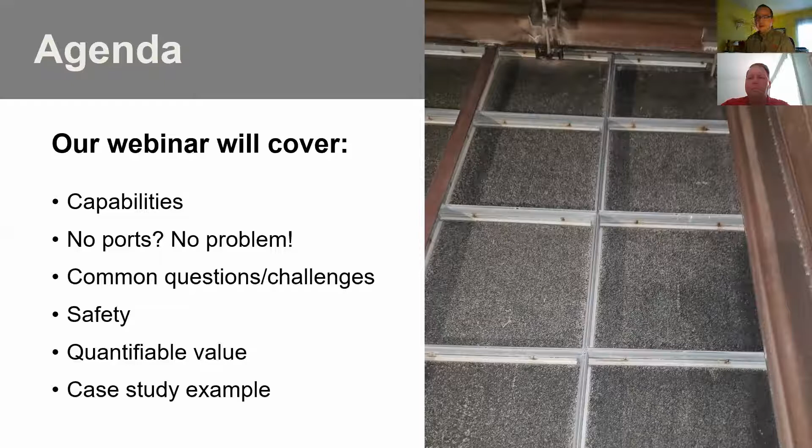We're going to cover 6 main points today: process capabilities and how the system works. Port installation. You don't have ports? No problem. Some common questions and challenges that we see daily. Safety. Fifth, quantifiable value. What can this service really do for you? And lastly, we'll introduce a new case study from a recent project you all might be able to relate to.

Thank you, Steve. Just to start, the port layout is probably the most critical part of our planning stage. It helps us facilitate access to ensure that we can clean as much of your catalyst surface as possible. If you can provide unit drawings for your wall design, all we would need is the wall thickness, your insulation depth. Do you have a liner plate? Do you have positive or negative pressure? And are there any interior impedances, beams, columns, any other obstructions? We would need to know about that.

And when we do port installations, we typically prefer to do one port installed at a time to ensure there's no unit interruption. But in an emergency situation, we could discuss doing multiple ports at once in order to get you back at peak operational performance. Before we do that, we would need to do a review to make sure it can be done safely.

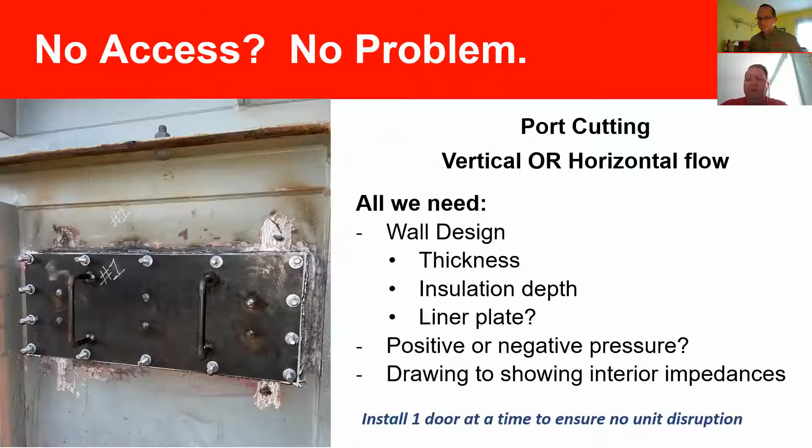In units where there's a horizontal layout, where the floor is open, like a grating system, as opposed to a catalyst resting on beam supports, we've been asked if we can clean through the grating, and the answer is yes. In that instance, we would just need to increase the vacuum to take into consideration the extra distance away from the catalyst face. The important thing to remember is that this is a repeatable process, basically an investment in plant stability. Once the ports are installed, you can do a routine online cleaning anytime you want to keep your facility running at peak performance.

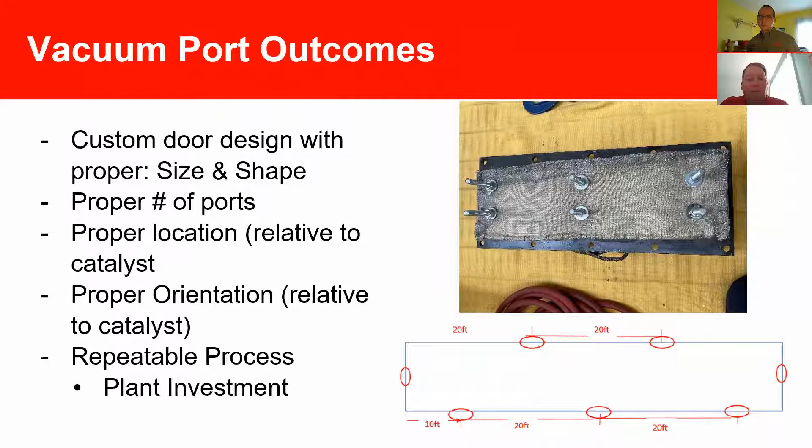Can you clean your catalyst online? The answer is yes. We can and have serviced all catalyst manufacturers, any age from brand new to 10+ years in service. All designs can be cleaned, whether corrugated, extruded, pleated, or if you have a small or large pitch.

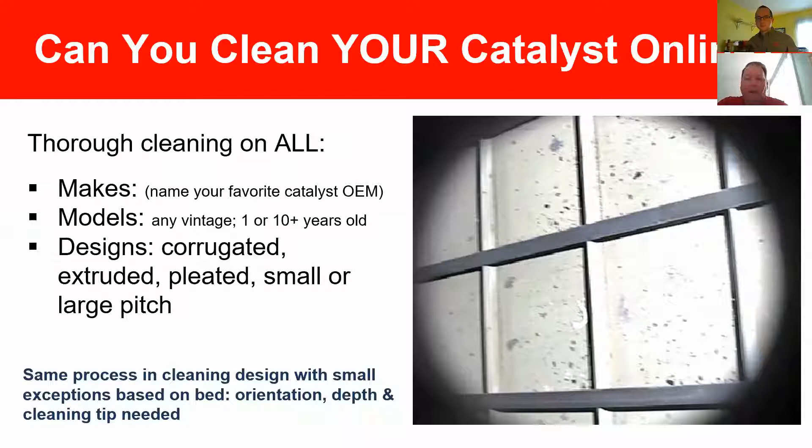An important safety item to consider is, what is your current operating temperature? Most catalyst systems operate in the 700 to 800 degree range. This is important information as it helps us determine the necessary PPE and cleaning equipment to provide work safely and efficiently. I'll cover some of this in detail in a case study at the end of our presentation.

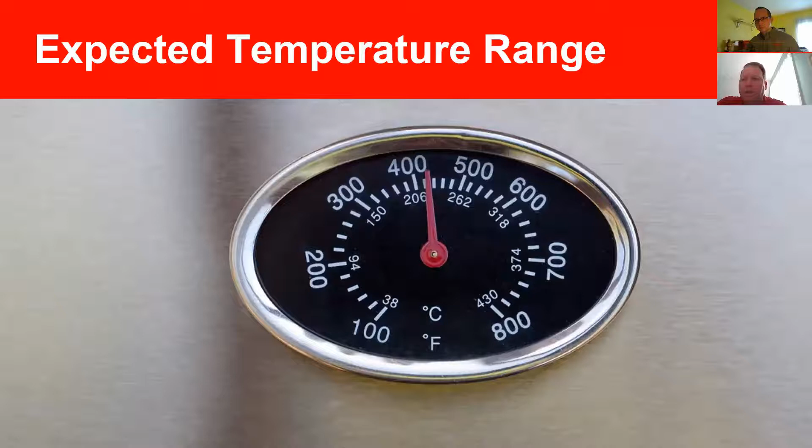Thanks, Ray. We get a lot of questions on, which catalyst can we clean? The SCR, also known as the DeNOx catalyst or NOx catalyst, is the most prominent used in this space of refining and petrochem, but many of you who are listening to this also have a CO catalyst, which usually is the first line of defense in the gas path and very prone to masking. So it is a candidate for online cleaning. We can certainly clean both SCR and CO catalyst, as they both require the same process to clean them online.

So no matter what type of catalyst, it's very common to see obstacles that need to be considered in the cleaning design. No one unit out there is exactly the same. So there's three main or common obstacles that we see, and I want to just introduce how we deal with each one, so you feel more comfortable with it. Ray's touched on a few of them, but I'll dive in a little bit deeper here.

The first off is the module grid. There's a lot of 90-degree angles created by the grid that allows material masking debris to accumulate. In this particular instance, we're going to have a custom lance tip as a solution to get into that corner and pull vacuum and be able to clean it effectively. Second, it's not uncommon to see structural beams through the middle or around the perimeter of the duct, which can create an obstruction. We're going to design a lance orientation and design, as well as port location, to account for this so we can gain full access.

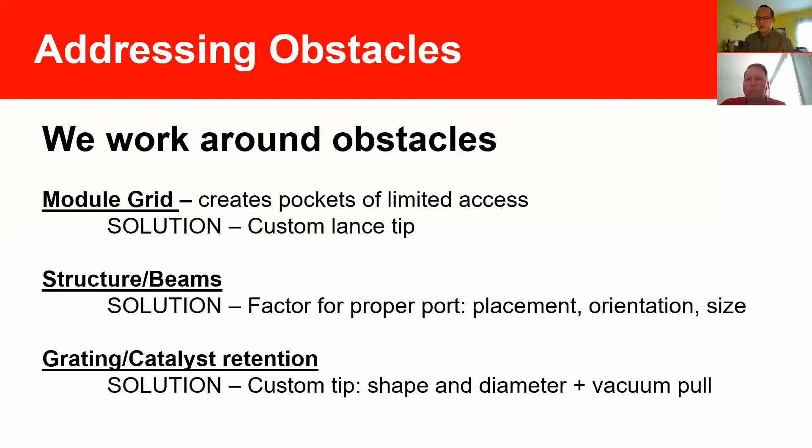So the answer to your question, if you're concerned about stack particulate, it is not an issue or should not be a concern. Since we're only pulling vacuum and not back blowing as we would with a traditional offline cleaning, online we're pulling vacuum only. Any debris that we liberate is pulled into the vac bag, and we use up to 27 inches of pressure, which is more than adequate to collect the debris and not have it go downstream.

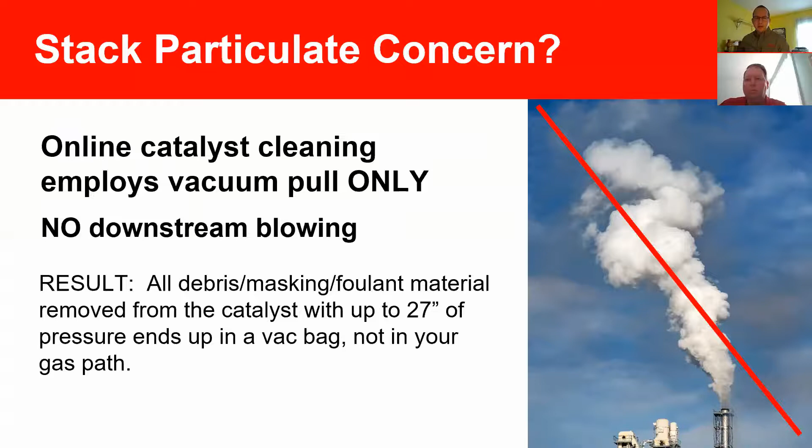So safety first. A lean crew is not necessarily better for this type of work. I know that lean is a buzzword to drive a lot of different projects, but it's very important to lead with safety. In doing so, what we do is have a crew large enough to rotate men or operators every 15 to 30 minutes, so that we can reduce or eliminate any kind of heat fatigue concern. A proper cleaning system design puts the stress on the cleaning equipment itself and not the user, which is a big benefit. So what we want to focus on here is letting the equipment do the work.

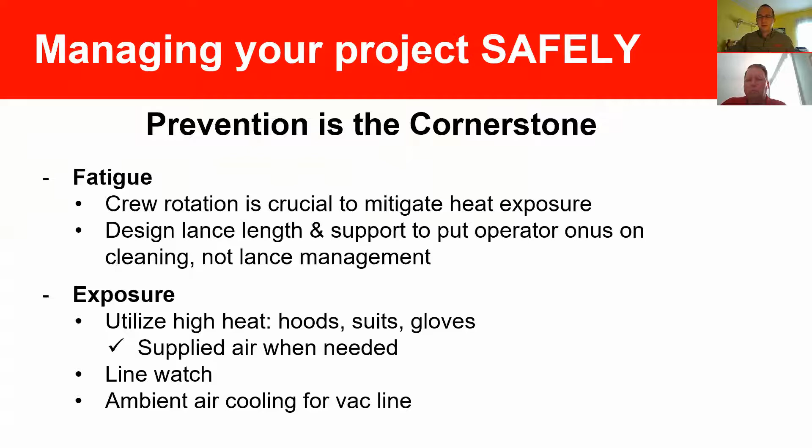High heat PPE is utilized for all crew members and not just the folks on the top of the unit that are doing the cleaning. It's important to note that the vac line itself also gets hot, so we're going to engineer a tempered air system there to make sure that we mitigate any kind of dangers along the way of the cleaning process.

So what does an online catalyst cleaning really do for you? Let's let the numbers talk for themselves. Ray's going to introduce a few of the deliverables that our clients are used to seeing. Right, Steve. Yeah, I wanted to spend some time on this information as this is what our customers ask most. What benefits can I expect from the online cleaning? And we just listed out a few here and just wanted to cover them. These are typically the results that we can accomplish.

First being increased conversion. Your catalyst was designed to your specific conversion requirements, and keeping it clean helps in this process. Second, we get ammonia to the active conversion sites. If you look at a piece of catalyst the size of your thumbnail, it has the active surface area of basically the size of a football field.

When you have fouling on that surface, the entire flow behind the catalyst blockage won't be used. And this causes a problem when you test your catalyst. If your other catalyst is being used efficiently and you test the blocked area where the catalyst is not being used, the test may tell you that your catalyst has more remaining life than it actually does. And if you put it back in service, there's a possibility it may fail before your next scheduled outage, which obviously causes a big problem.

Next, cleaning enables even distribution. Again, we want to use the entire catalyst bed for maximum conversion efficiency. Also, it will minimize ammonia slip. When you're using the active sites efficiently, you don't have to use excess ammonia to make your conversion. And in many cases, we see that the savings in ammonia usage actually exceeds the cost to do the cleaning.

From an environmental standpoint, we meet your permit. You want to make sure that you're meeting permit limitations. You don't want to open a can of worms, being out of compliance, and then have to deal with an environmental audit. That's just headaches for everybody. From your equipment, you want to control your back pressure. This will help prevent unnecessary wear and tear on your equipment.

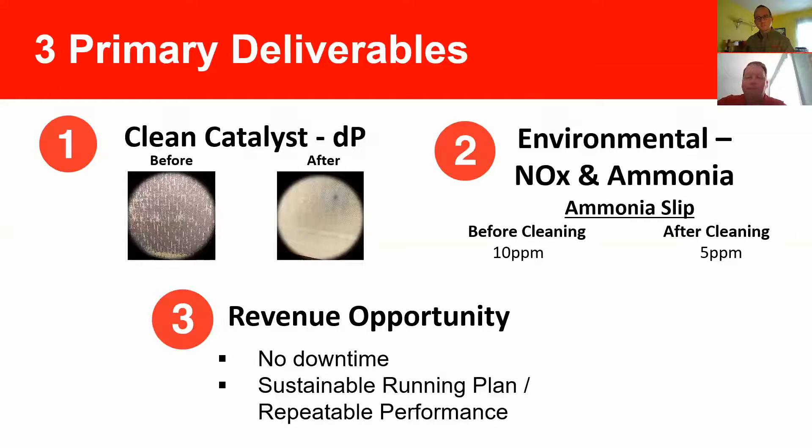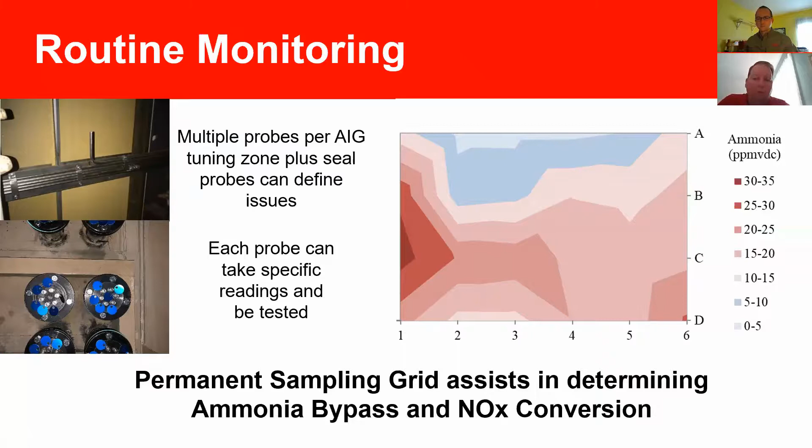Some items to check before beginning a cleaning: vacuum. You need to know what vacuum to pull in order to do a thorough cleaning without actually collapsing the face of the catalyst. Make sure to have the proper cleaning tips so you never touch the face of the catalyst. And you want to have the correct counterbalance on the cleaning lance to operate efficiently and to prevent stress on the cleaning technicians. And lastly, you want to use someone with experience.

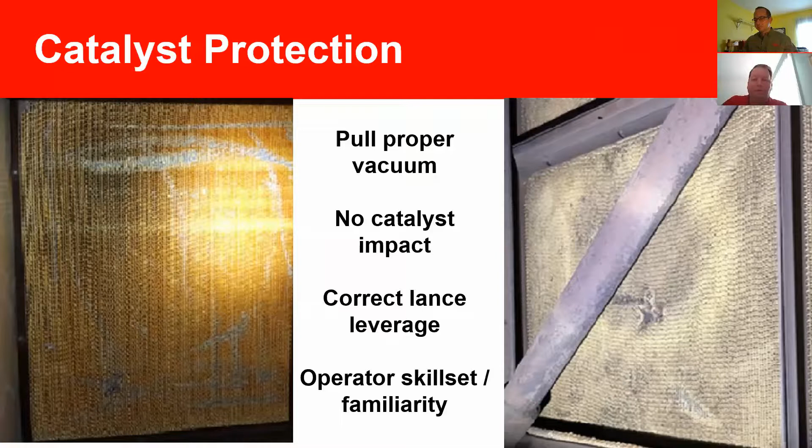Fantastic, Ray. Thank you. Now I get to introduce a case study from a recent project that we completed at a West Coast facility. It's a refinery that had experienced a recent upset and refractory let loose, coating their SCR. This caused obvious issues downstream, one of which was the SCR not being able to convert NOx, and also, it being masked, increased back pressure.

The plant was forced to run at limited capacity, which hurt revenue and output, and it was not getting any better with time. Sometimes you're lucky enough for these things to go away on their own. This was not one of those cases. The plant had not even ruled in the option of online cleaning, as they had no way of accessing the catalyst while the unit was running.

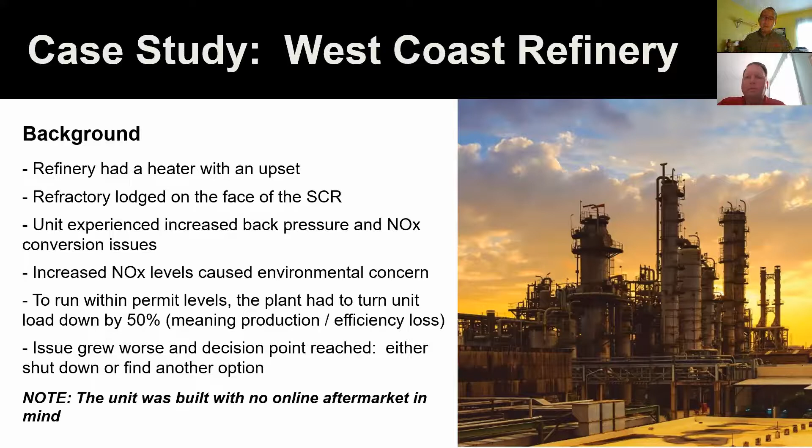So in reviewing the unit design, we were able to propose a series of ports. Based on size, port orientation and location, we were able to design a system that maximized catalyst face access and would allow us to clean the catalyst now and any time in the future if they did have another upset. So we had some fantastic results from this project, and Ray's going to introduce some of those now.

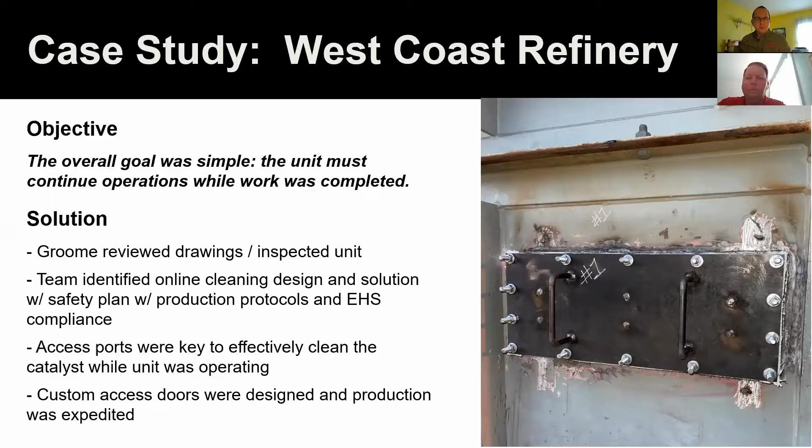Yes, and this installation of the cleaning ports will allow cleaning to take place at any time in the future, like we mentioned before. There will be no shutdown if the catalyst gets masked again. Again, this is basically an insurance policy to keep you up and running. When we did this cleaning, our cleaning reduced the back pressure by 55%, back to their original design pressure.

We worked 4 days around the clock to clean the catalyst, and this prevented what would have been 3 days of complete shutdown. And we know when you shut down, there are always additional issues that come up, leading to more delays, more lost revenue, and more costs for any other repair items that you may have to do. After the cleaning, NOx conversion returned to the permitted limits, and the unit engineer told us that the cost of our cleaning was basically a fraction of the lost revenue that would have happened if there was a shutdown.